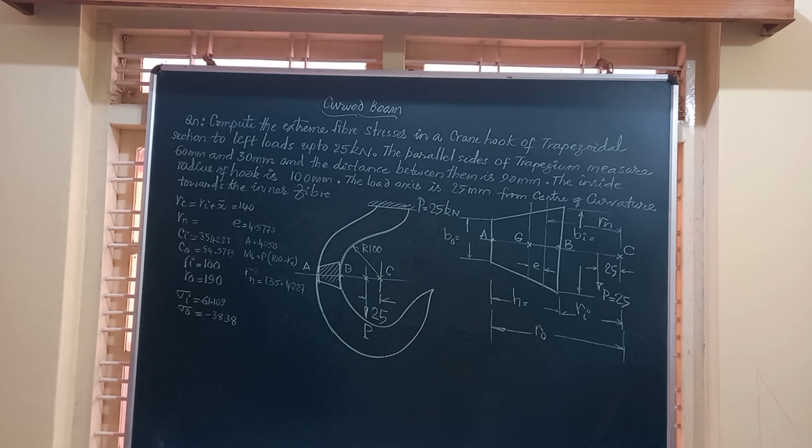Myself, Dr. M.H. Annaya, and in today's video, we are going to learn how to obtain the extreme fiber stresses in a crane hook of trapezoidal section.

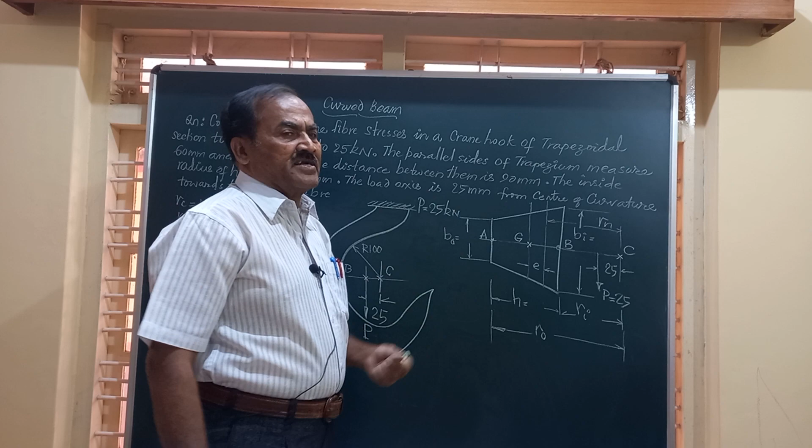The question for today's video reads: compute the extreme fiber stresses of a crane hook of trapezoidal cross section. We have a crane hook of trapezoidal cross section, with dimensions given as 30 mm and 60 mm, that is the maximum dimension and minimum dimension, and the distance between these two parallel edges is given as 90 millimeter.

The inside radius of the hook is given, the capacity is also given, and we are required to find the extreme fiber stresses. These are the stresses at the outer and inner fibers of the critical cross section, represented as AB. AB is the critical cross section, C is the center of curvature, and this radius is given to be 100.

Remember friends, in this problem, the load axis is 25 mm from the center of curvature, towards the inner fiber, and the load is acting there. In all the problems we have done so far, the load used to act through the center of curvature, but now it is shifted by a distance of 25 mm.

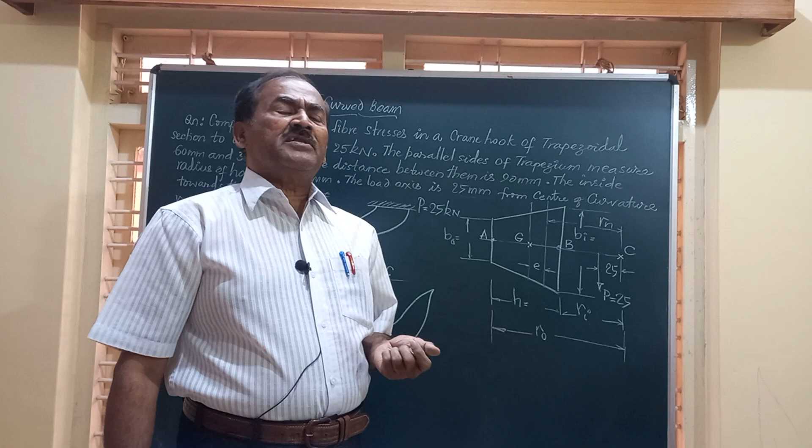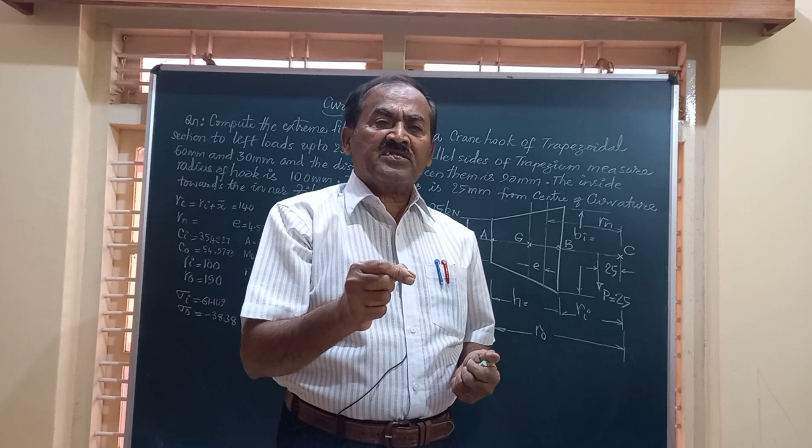This comes only into the calculation of MB. Normally we take MB equal to P into RC, when the load acts through the center of curvature. But here it acts 25 millimeter towards the inner fiber, so in the formula MB equals P into RC, we should take MB equals P into RC minus 25, because while computing the bending moment, it's the distance between the load axis and the center, that is the axis CG.

So friends, this is how we proceed. Remember, in the same problem, if the load were acting away from the center of curvature, after C, in that case you would take MB equal to P into RC plus that extra distance, whatever distance the load is applied from the center of curvature.

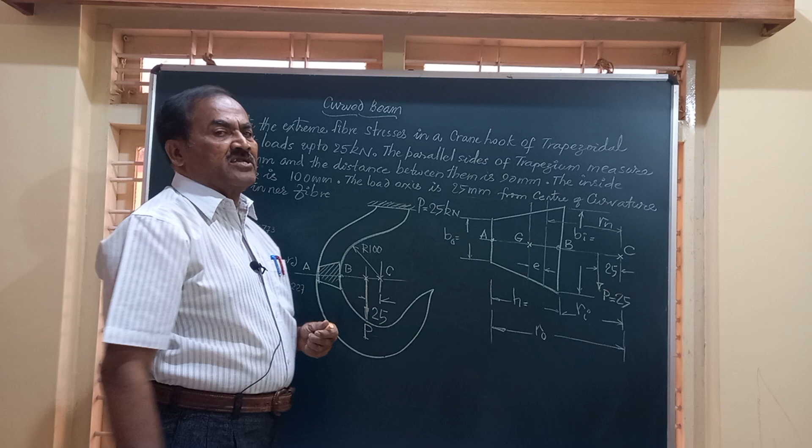So there are three cases. One is when the load passes through the center of curvature, where you take MB equal to P into RC. If it is towards the inner fiber B, we subtract the distance from RC. If it is to the other side of C, we have MB equal to P into RC plus this distance. These are the only three possibilities for how the load can act.

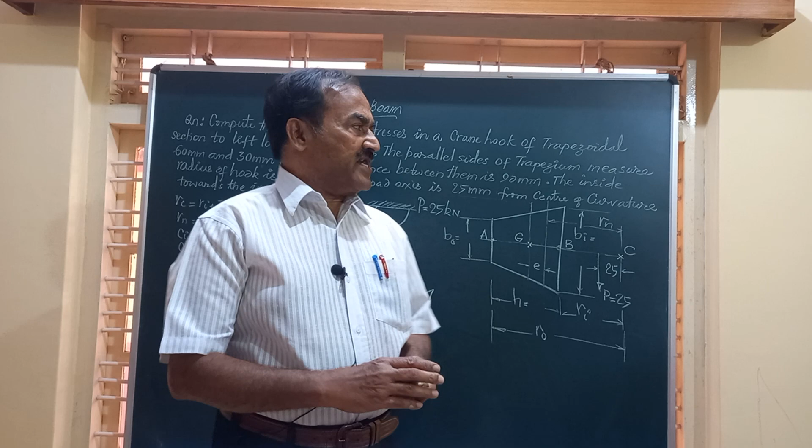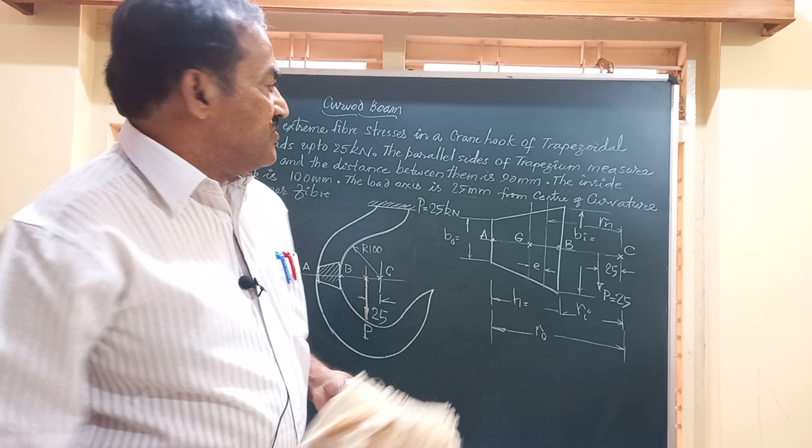Now friends, to find the extreme fiber stresses, you have the fundamental equation given by the formula. I'll remove this sketch and write down these values. First, we will see how to compute sigma i and sigma o.

Remember friends, this is going to be a tensile stress. The total stress at point B is given by sigma D plus sigma Bi, where sigma D is P divided by area of cross section, and sigma Bi is MB into Ci divided by A into E into Ri. This is the formula we have.

Similarly, for the stress at the outer fiber A, it is given by the same formula, sigma D plus sigma B naught. So sigma D is P by A, plus sigma B naught is minus MB C naught divided by A E R naught. All these equations are available in the machine design data handbook.

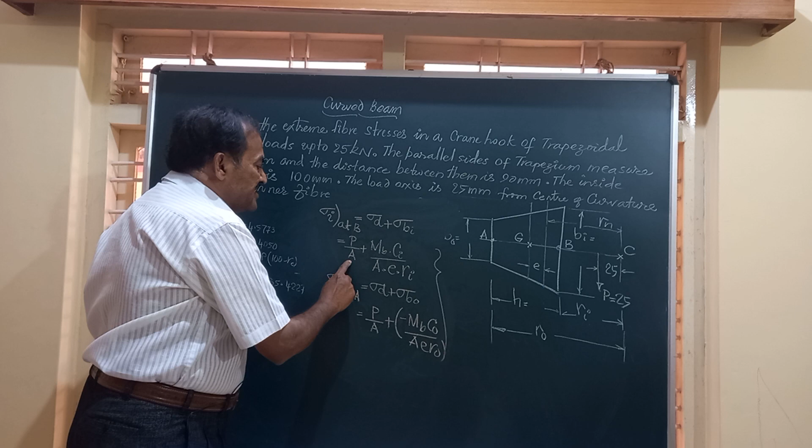Friends, to get the value of sigma i and sigma o, we should know what is A, the load, value of MB, Ci, Ri, etc. So first let us compute all these parameters required to calculate sigma i and sigma o, the extreme fiber stresses.

Friends, here P is the load. The load is given to be 25 kilonewton, that is equal to 25 into 10 to the power of 3 Newton. Then we have got area.

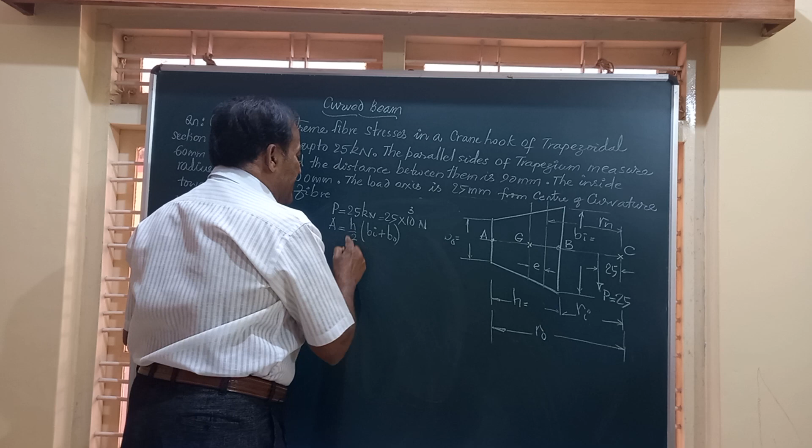Area for a trapezoidal section is given by the formula h by 2 into bi plus b naught, that is half of the height into the sum of the parallel sides. H is, as you can see here, the value of h.

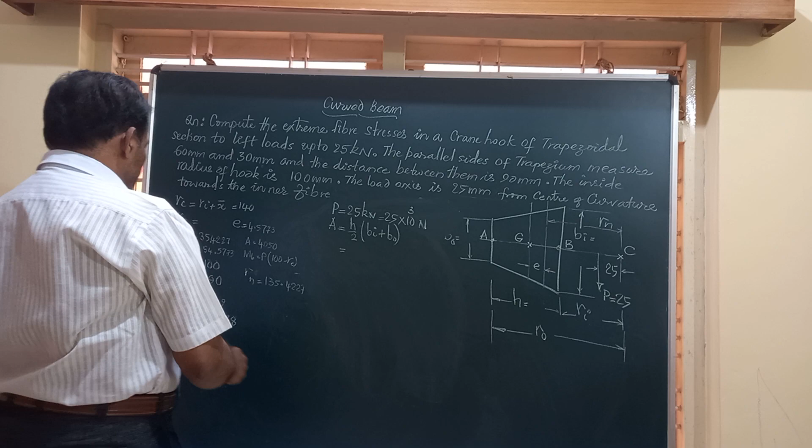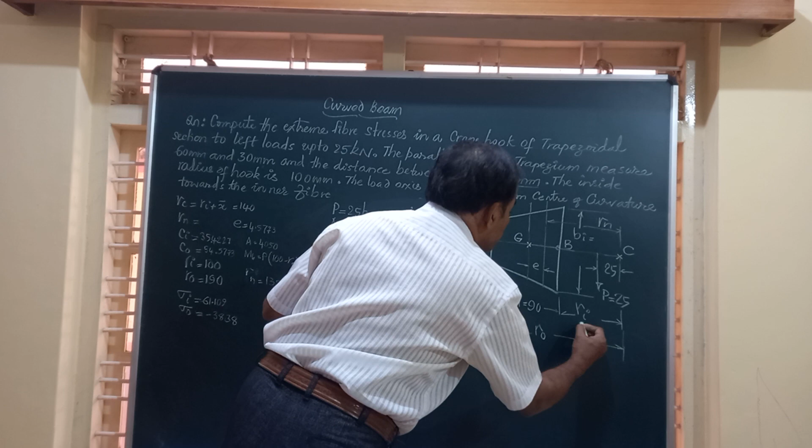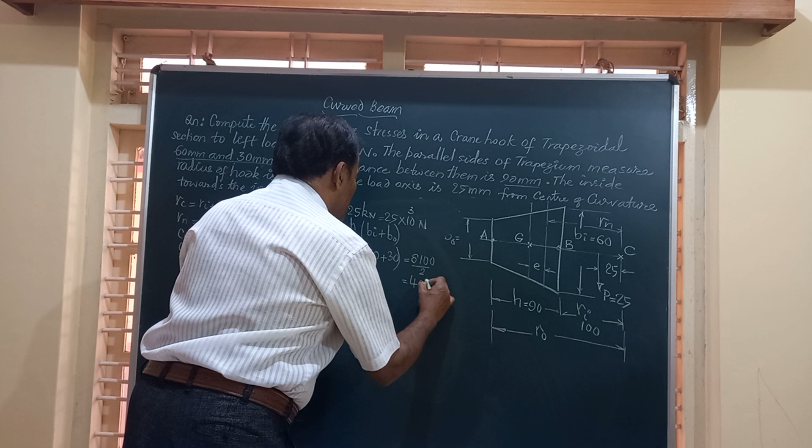Bi is this value, that is 60, given in the question. You can see here 60 mm and 30 mm are the sides. So Bi is 60, B naught is 30, and if you simplify this, it works out to area equal to a value. Let's find out: this is 90 into 90, 8100, divided by 2, that is 4050, 4050 mm square is the value of this area of cross section.

Then you can find out what is sigma d. You can get the value, later on we will calculate. So we can have the value of this area of cross section, load is known to us, and hence we can easily calculate what is sigma d.

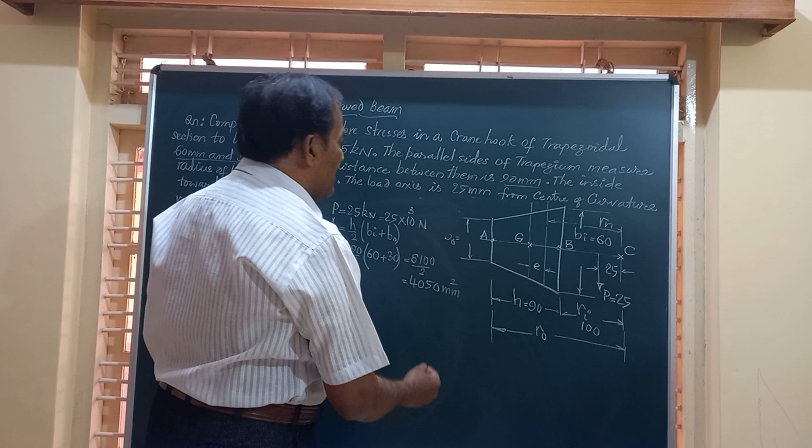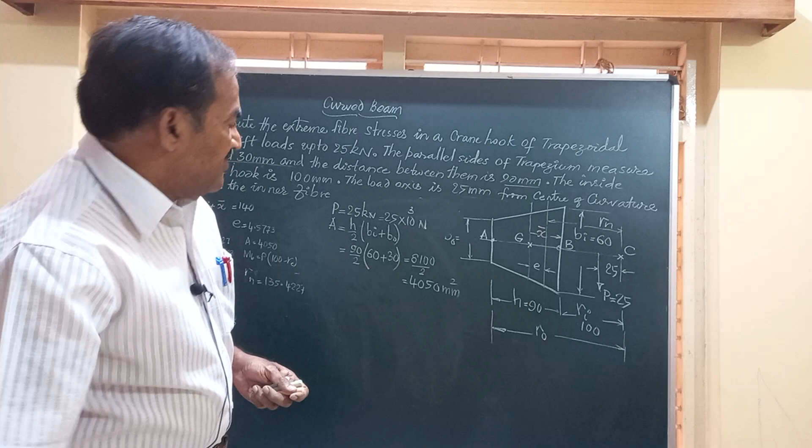Then let us see what is RC, Rn, etc. RC is the distance from center of curvature to the centroidal axis. So this is Ri, and if you call this distance as x bar, Ri plus x bar will give you RC. So I will write down here, RC is equal to Ri plus x bar.

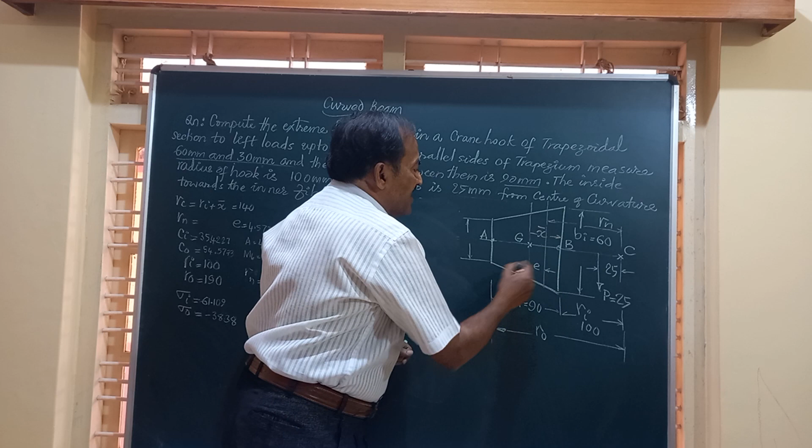What is x bar? The distance of this centroidal axis from the inner fiber is given by the formula x bar equals h by 3 times (bi plus twice b naught) divided by (bi plus b naught). This equation is available in the handbooks. If you simplify this, h is 90, that is this distance is 90, divided by 3, bracket bi is 60 plus twice b naught is 30, divided by bi plus b naught, 60 plus 30.

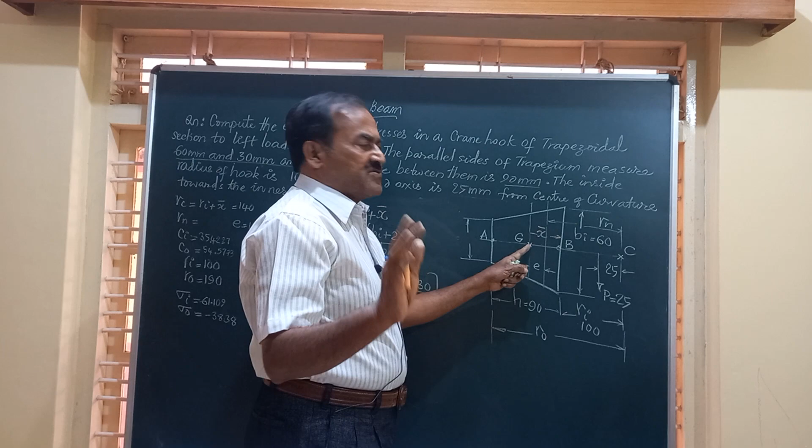If you simplify this value, you will get x bar equal to this. If you simplify, 90 gets cancelled here, so this works out to 120 by 3, that is 40 millimeter is the value of x bar. That is, from the inner fiber B to the centroidal axis is 40 mm. Therefore, RC, from here to the center of curvature, is Ri plus x bar. So RC equals Ri is 100 plus x bar is 40. This works out to 140 mm is RC.

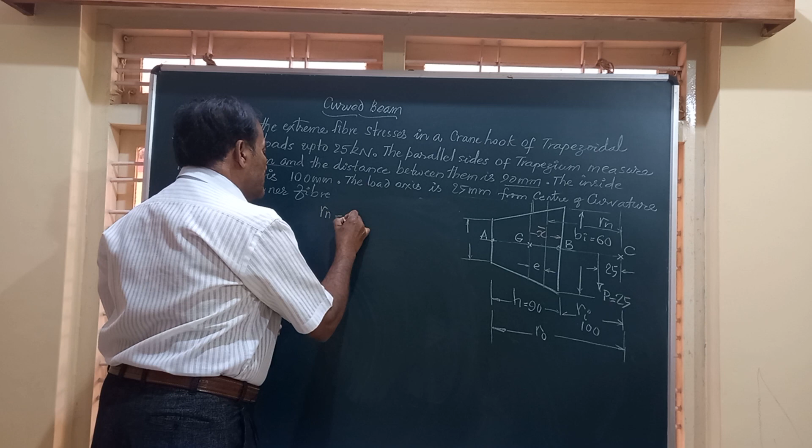Let us move on to this Rn. For the trapezoidal cross section, Rn is given by the formula Rn equal to h by 2(bi plus b naught), that is the area of cross section capital A, divided by [bi r naught minus b naught ri, divided by h, logarithm of r naught by ri] minus (bi minus b naught). You know all the parameters. If you substitute in the formula, you will get this value of Rn.

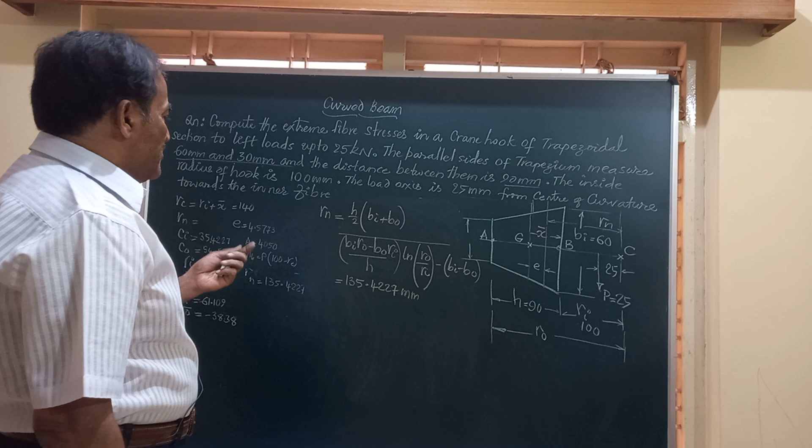As 135.4227 mm. You know Rc, you know Rn, you can obtain the value of E equal to Rc minus Rn. Rc is 140, minus 135.4227. This works out to the value.

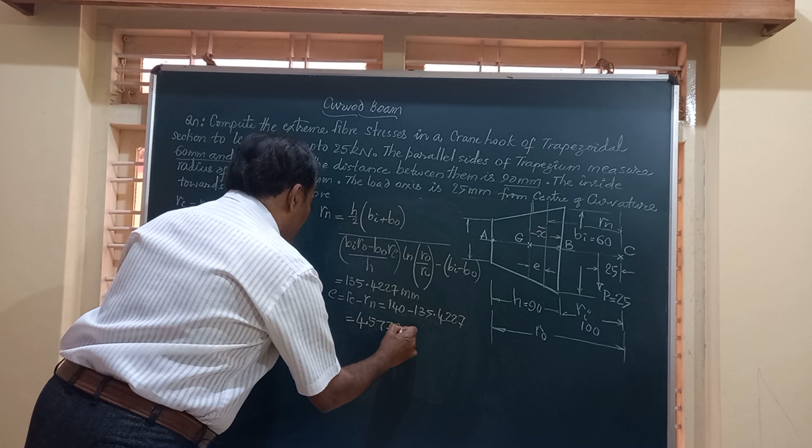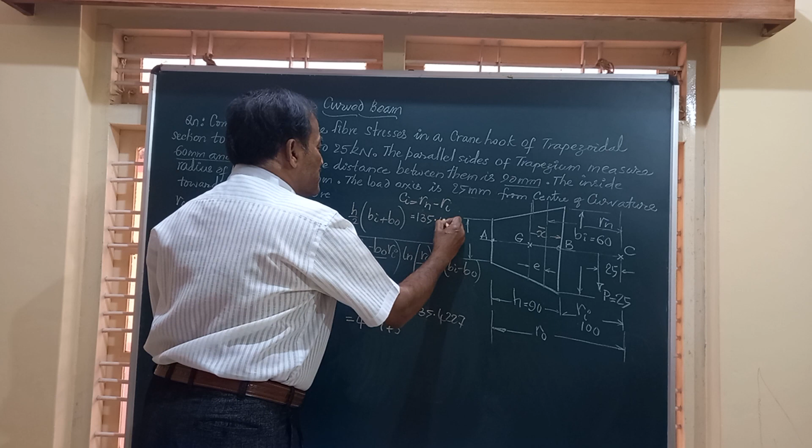4.5773 is the value. Then you can find out what is CI. CI is nothing but Rn minus Ri. Rn value is 135.4227 minus Ri is 100, that is 35.4227.

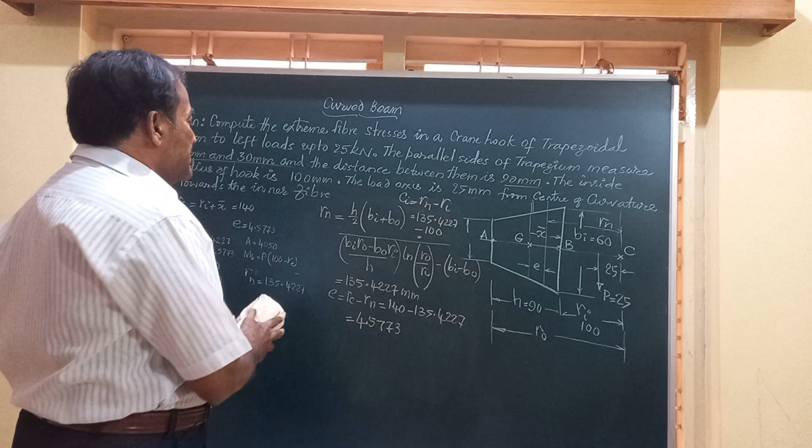So we have all the values required to compute the extreme fiber stresses, namely sigma I and sigma O. We will write down this again, that sigma I at B, at the inner fiber of the critical section, is sigma D plus sigma Bi. This sigma D is P by A, plus sigma Bi is MB into Ci divided by AERI.

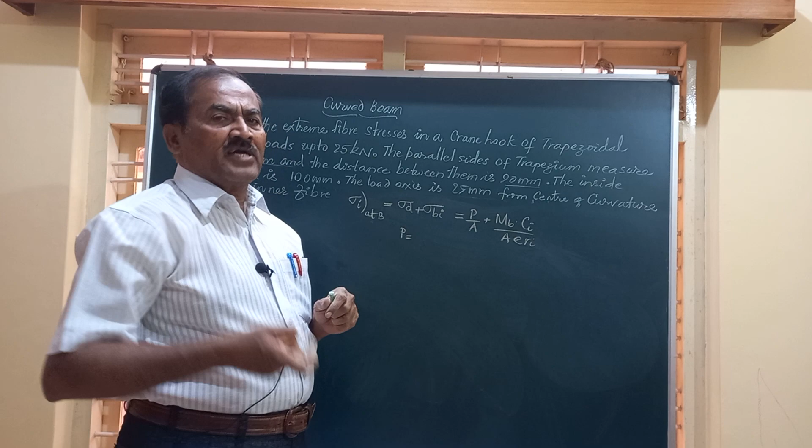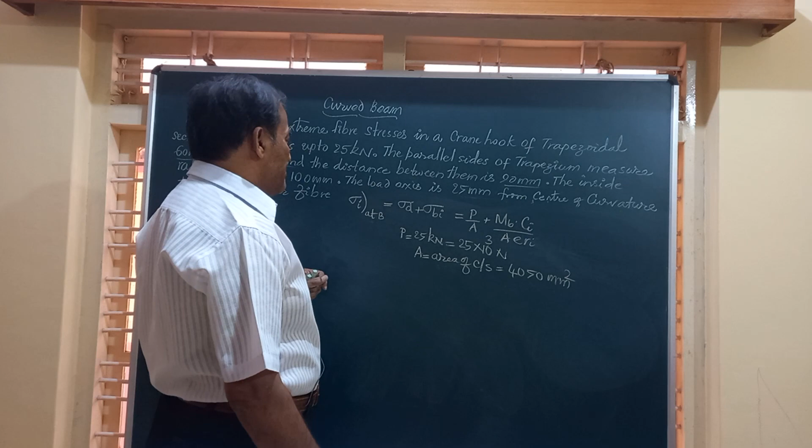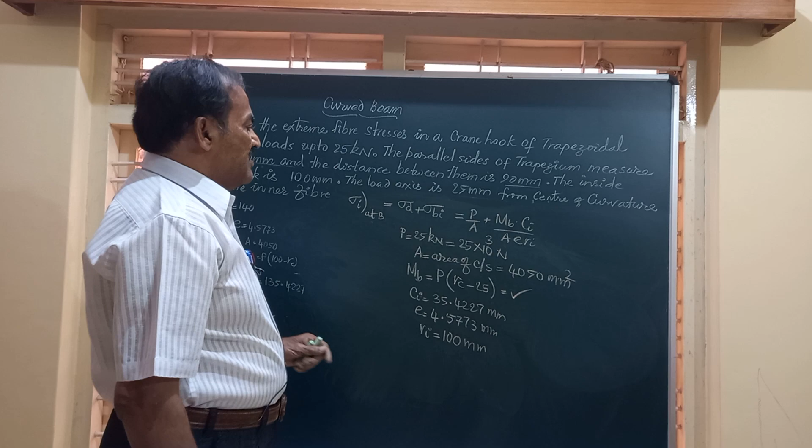Then, the value of CI we have got as 35.4227 mm. MB, CI, area we know, E value you know is 4.5773, and RI value is 100. So we have got all the values required to compute sigma I. If you make all these substitutions in the formula, you get this value of the fiber stress at the inner fiber, that is at B, as sigma I equals 61.109.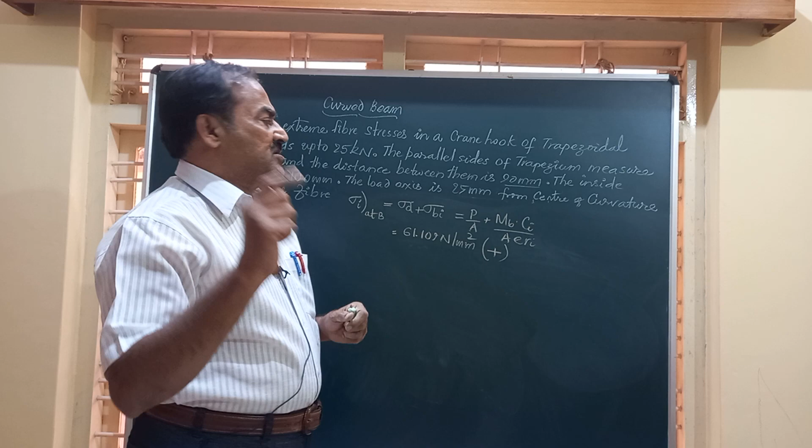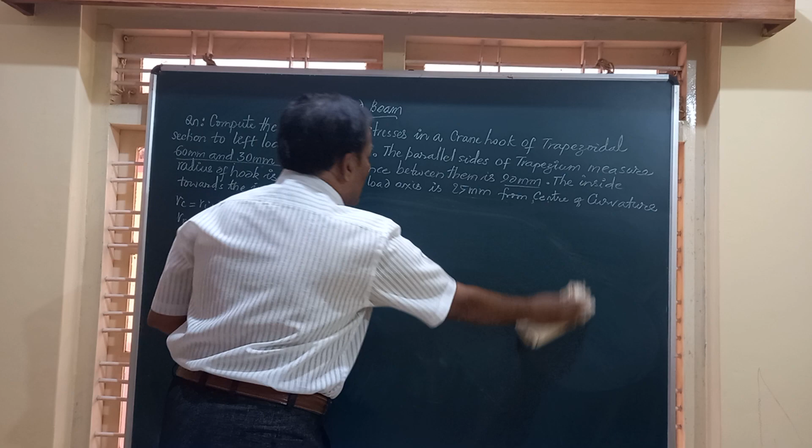Newton per mm square. So this is a tensile stress always for any crane hook irrespective of the cross section. And on the same lines, let us find out what is the value of this fiber stress at the outer fiber. So you can write down at the outer fiber, that is at A, sigma O, the total stress at A, is given by P by A plus or minus sigma B naught, that is equal to P by A minus sigma BO is MB C naught divided by AE R naught.

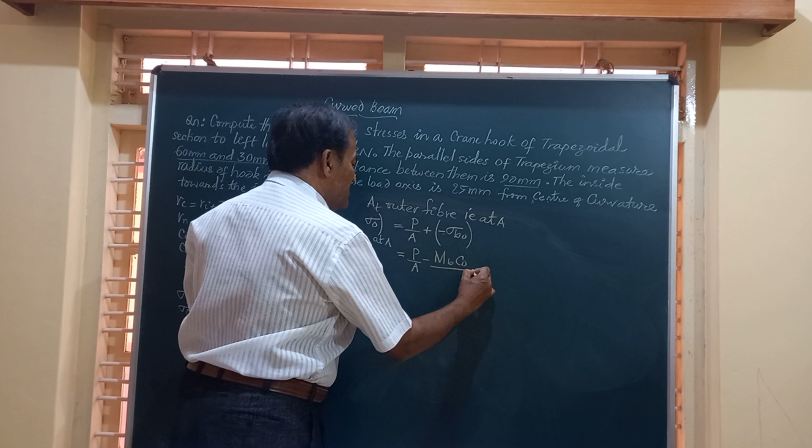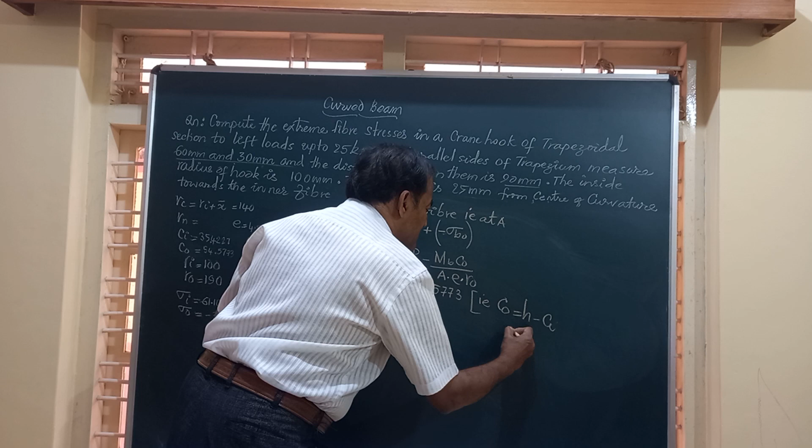Here we know all the values. This C naught is equal to 54.5773. How do you obtain this? Here, CO is equal to H minus CI. H is 90 and CI value is 35.4227. And this is the value you get.

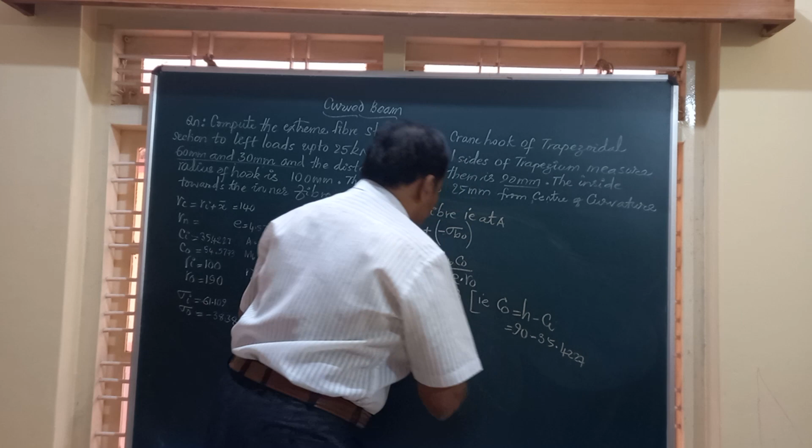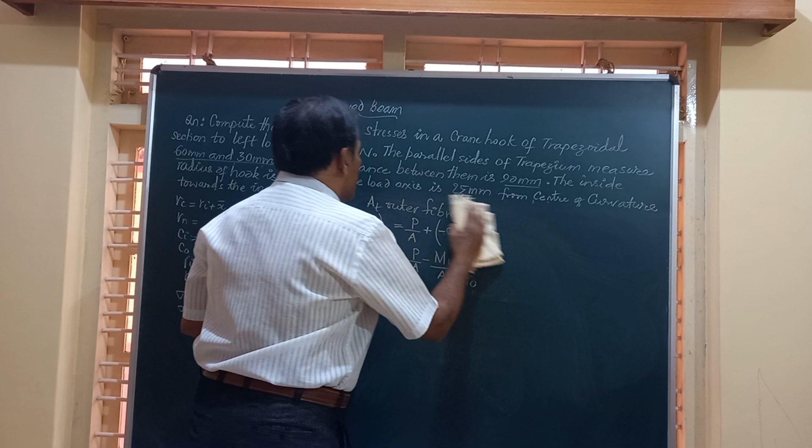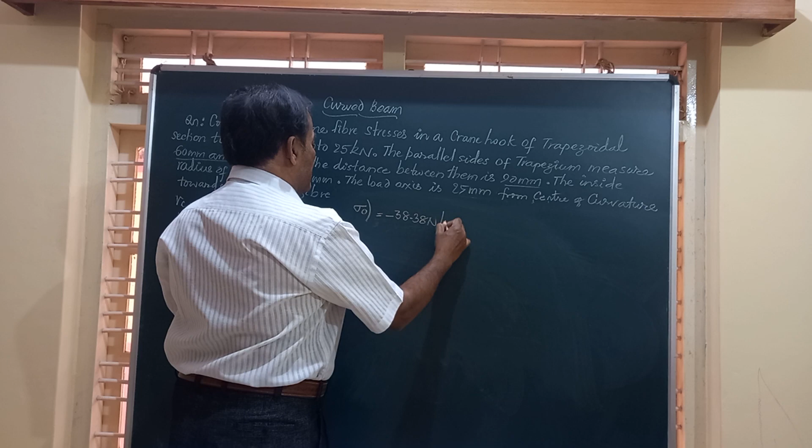So we got the values of all these. Substitute in the formula and obtain the value of sigma O, stress at the outer fiber. Therefore, sigma O works out to minus 38.38 Newton per mm square. We are able to compute both sigma I and sigma O at the critical section of this crane hook of trapezoidal section.

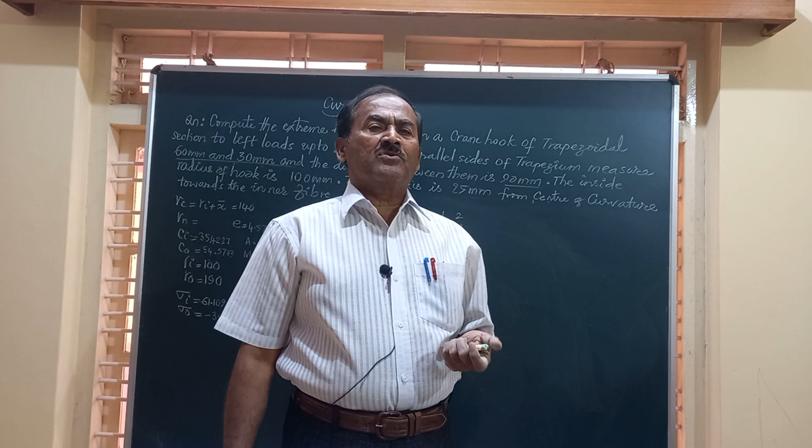I hope the presentation was interesting. Please go through the complete video without skipping any of these important parameters I have told you.